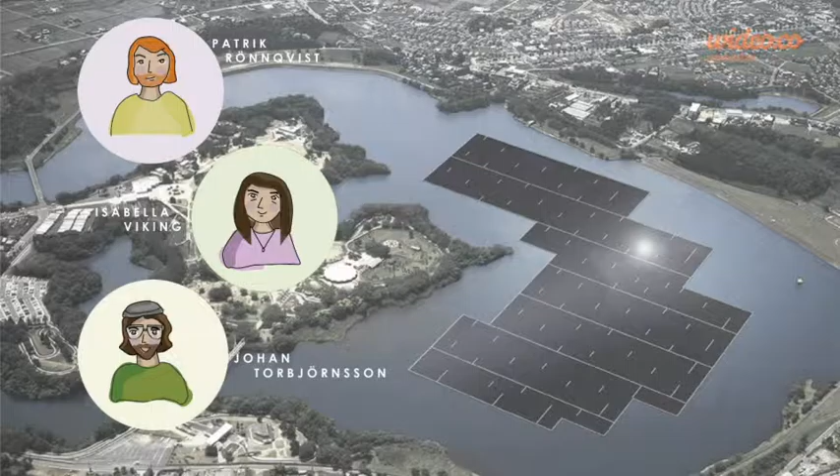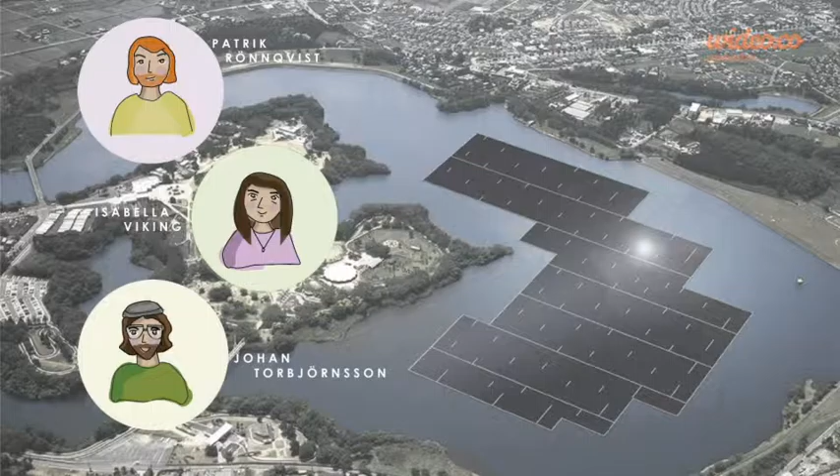The technology to build cities on water is becoming more developed. Pontoons that are no longer dependent on the loads being placed in a particular configuration are now becoming available. This will open new opportunities for urban development. This project's participants are Patrik Rönnqvist, Isabella Viking and Johan Torbjörnsson.

The urbanization is worldwide regarding the densification and rise in population in cities. In the long term, this is leading to a situation where the amount of land to build on is lacking, and a new way of urbanization needs to be developed. The conclusion, that in the future there will be a bigger market for building on water, is not irrelevant.

When Luleå has a shortage of interesting and more daring architecture, the bow will be tightened, and new ways to reach an interesting architecture are going to be tested, which in turn is linked to the unique location.

This leads to the question, what is distinctive when constructing on water in northern climate? The main question is divided into 3 sub-questions. Which architectural possibilities are generated by building on water? How is the urban space enhanced by building on water? What technical solutions could enhance the connection between people and water?

Design references for the project consist of, for example, Aker Brygge in Oslo, which is a waterfront area with well-developed connection to water and with well-defined semi- and public spaces. By activating the inhabitants of Oslo with an artificial beach, dockings, squares and a harbour, the area is vibrating with life.

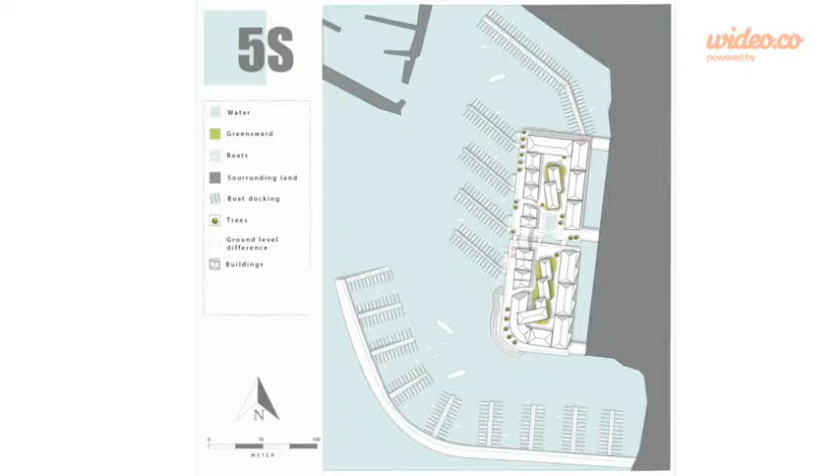The dimensions bring up to 462 parkings within the pontoon, a number of 0.5 per flat. The pontoons offer 924 residential flats, which gives a number of 0.2 boat docks per residential flat, and a number of 0.4 if boat docking on the wave breaker is considered. Hydraulic boat lifts make it easier for people to launch and take up their boats during seasons. Wave breakers located outside the marina area will protect from vibrations and waves.

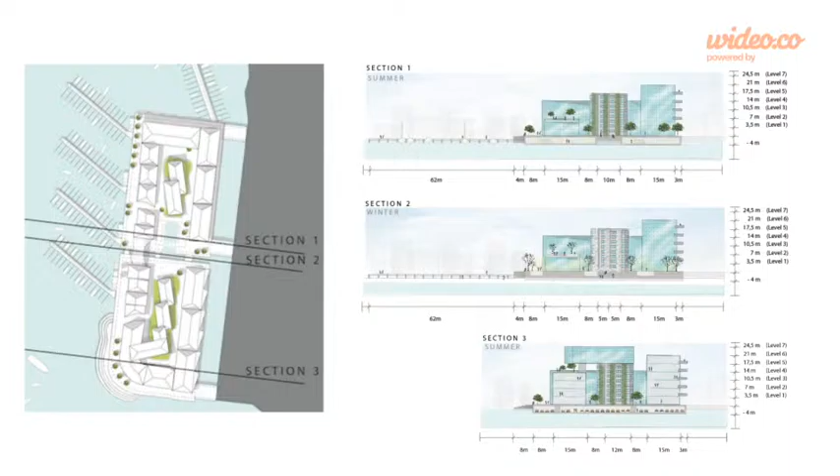Section 1 shows the central part of the pontoon during summer. The dimension allows space for both an energy and a purification system for sustainable living. Section 2 also shows the central part of the pontoon, but during winter. And section 3 shows the dimension for parking space within the pontoon and the area's landmark.

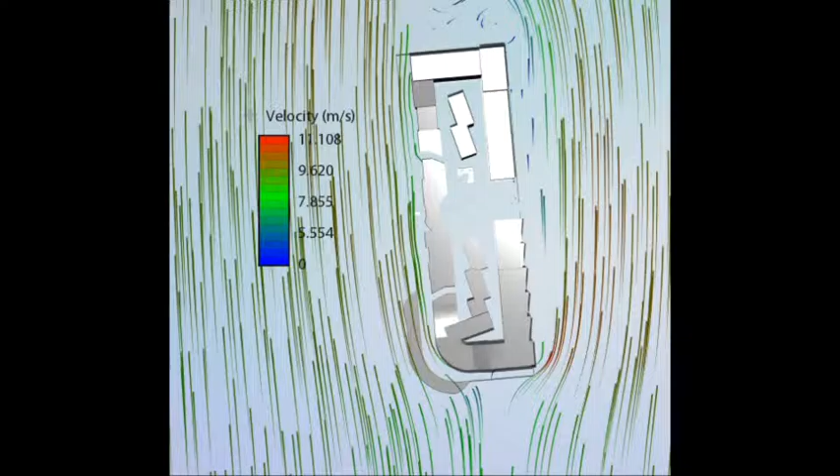Wind and sun study over the proposal. When building on water, the area becomes exposed to weather. To understand how the proposed area is affected by wind, a model was created and tested in Flow Design. The main goal is to create a wind-protected urban space within the area by using the buildings. The result shows there is little wind. The wind is set from the south at 7 meters per second. This is the most common wind direction and the highest regular wind speed.

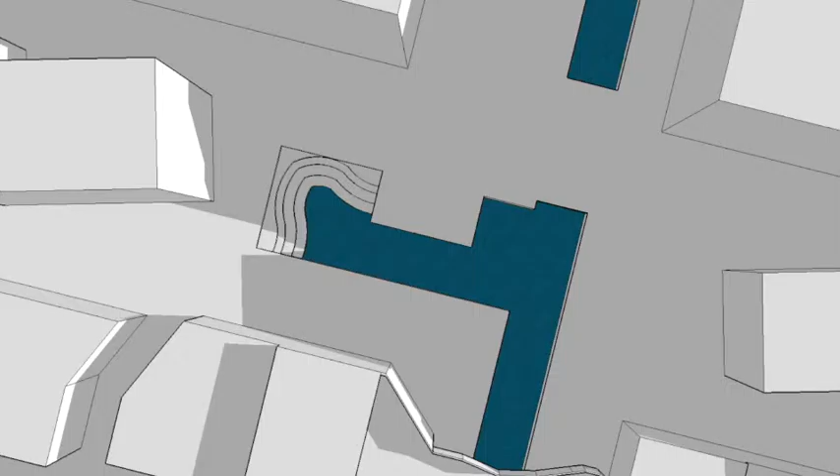Since natural light and sun exposure is a major key for human well-being, building heights have been set to expose as many as possible of the facades in the area. As seen in the sun simulation, most of the facades in the area are exposed to direct sunlight. The main square has been placed to be available to as much sun as possible and still be wind protected. The video demonstrates the square at 12 p.m. from the 1st of January to the 31st of December.

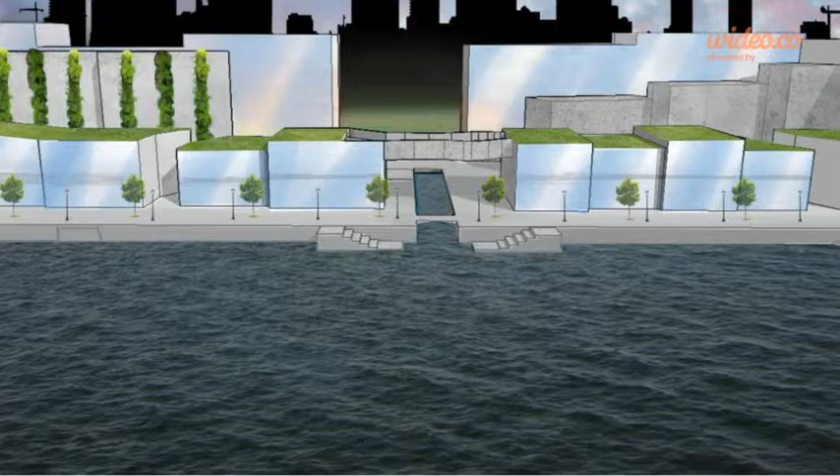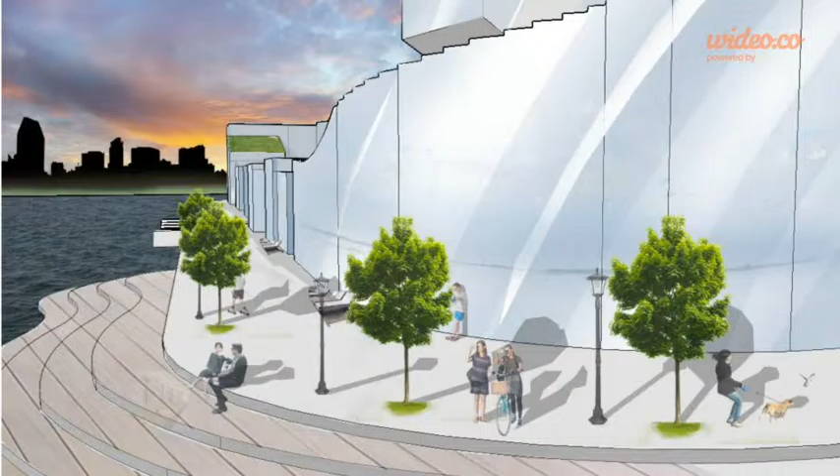The vision about the cityscape of the area is to capture the feeling of local elements in the surroundings, and mirror glass reflects and enhances the fascination of the view. Vertical greenery protects from heavy wind and brings more greenery to the area. A public space along the beach walks gives places for recreation. Light and heating coils make the space more secure and comfortable during colder seasons.

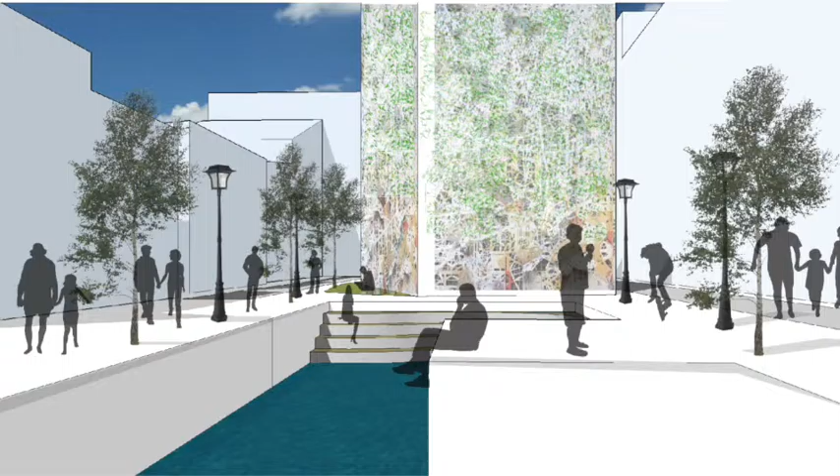The main square will work as the heart of the area. It's well protected from wind, and residents and visitors can use the pond for ice skating. The canal gives access to the ocean in winter, and in summer the wooden stairs work as a meeting point. From the square you can easily gain access to all other areas on the pontoon.